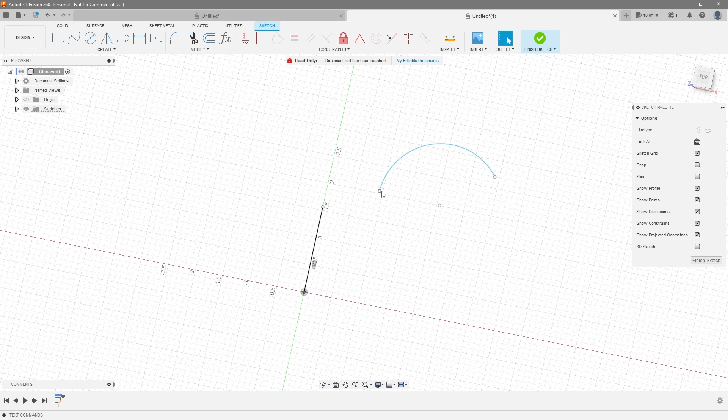If you're familiar with constraints in 2D sketching, let's say I have a line here. I can take an arc and connect that arc to that line. I can select both of those points and make them coincident, say I want that arc to be tangent to that line, and maybe make this a 2-inch radius. That is effectively a joint, but it's on 2D geometry rather than 3D geometry.

So what we are actually trying to do is connect various geometry of our modeled components together, just like we would do with a 2D sketch. For example, I want to connect this face to that face, or I want to connect this cylinder to that inner diameter.

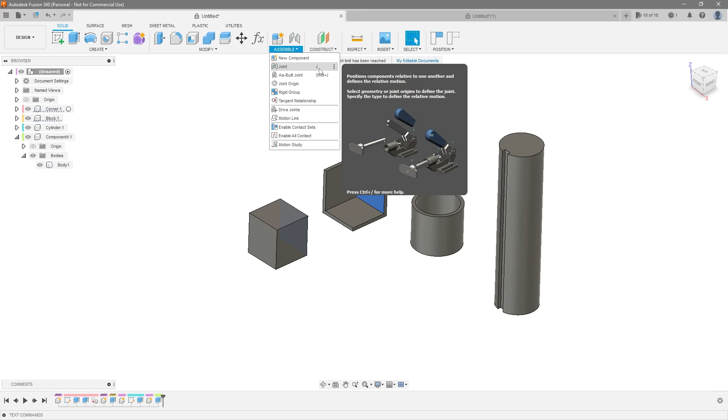So what I can do is select that face, hold Control, click that face, and then come up here and either hit the joint button, assemble joint, or hit J on your keyboard, which is my favorite way of doing this. Fusion will do its best - there is a method to the madness of how Fusion decides where to put items, which we'll go into in a minute. Fusion will try to lock that component to the other component with the information you gave it.

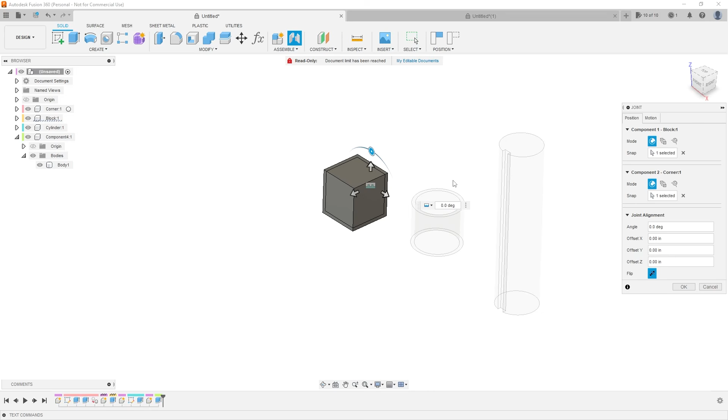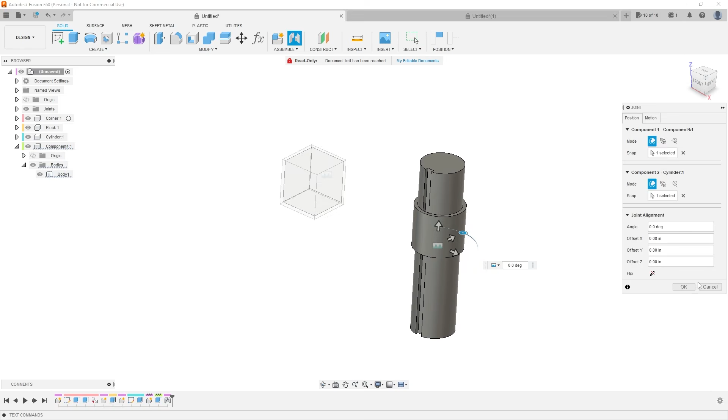Right now I can move this component, and right now I can move this component - they're two separate entities. But if I select that face, select that, hit J, and hit OK, now those two move together. I can do the same thing with a cylinder - select that and this, hit J on my keyboard, hit OK, and those will now move as one piece. However, you'll notice that this didn't line up in the center, or ring to ring or anything, because we gave Fusion too little information.

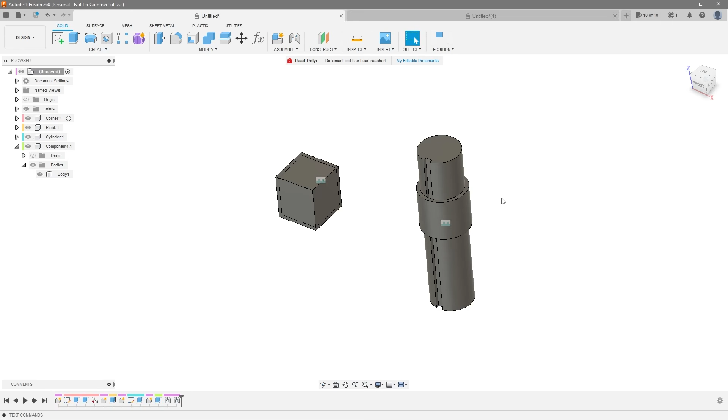We need to give it a better set of instructions. In order to understand why Fusion aligned this ring to this cylinder in that fashion, we actually need to take a step back and understand how components work, because I think that will clear up a lot of the confusion around joints in Fusion 360.

So in order to understand components, we actually need to understand the design tree a little bit, because that will really help explain how these components interact with each other when applying joints. Anytime you open up a new design, you have the top level part of your tree, but you'll notice that it's actually a component. We have one component already provided for us in our model, and all that is in it is an origin point.

This is a fixed component. This component cannot move, and anything that is designed directly under this component cannot move either, which we'll talk about in a second. But that origin point is one fixed or known spot on the model, so that way Fusion knows what to do with all the other components.

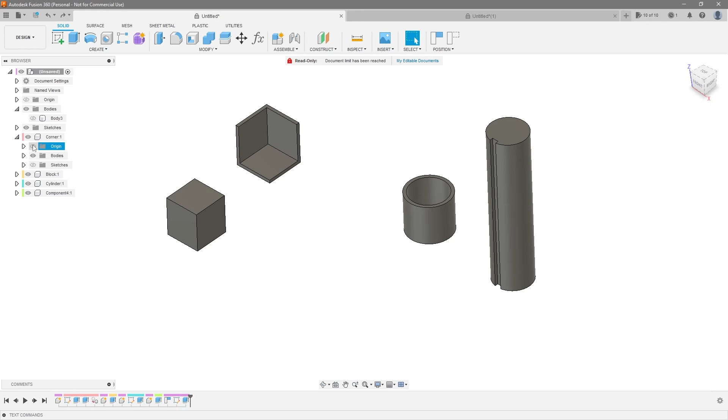Anytime you create a new component, you're actually creating a new origin point. If I highlight the origin point at the top of our model, it's right here—this is the one that can't move. But now that I've created a new component called corner, that origin can move along with that component.

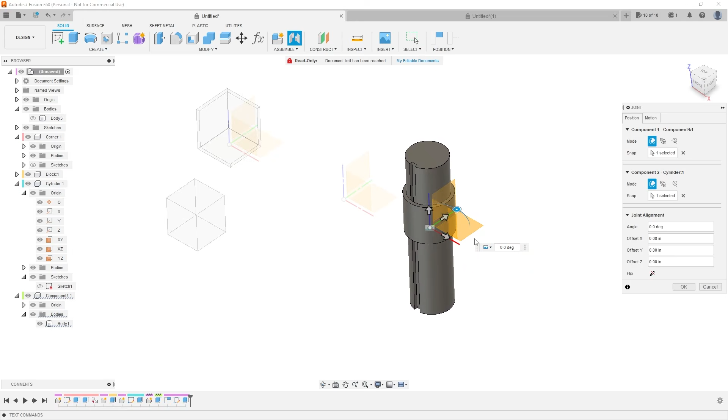What can often happen, which confuses a lot of people, is when you try to join this to this, we didn't really provide Fusion a lot of information on how we wanted those to relate to each other. If I open these up and show their origin points, all we said was this face to this face. If I hit J, Fusion doesn't know what to do with it, so it simply aligns their origin points. That's why this ring, for example, didn't align to the top or exactly in the middle between this face and this face.

That's why it's important to remember, because when you sketch on this top level component, that origin point is fixed. If I create a body, just a top level body right here, I can't move that anywhere, because it's drawn in relation to this origin point—not a separate origin point we would have given it if we created it as a new component.

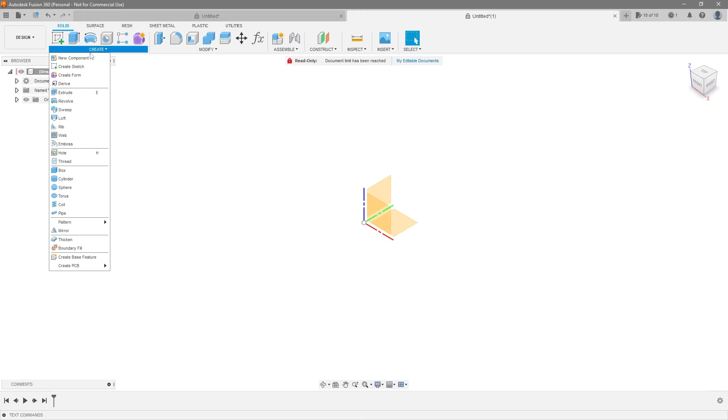That's why top level bodies cannot move, and it's almost always a good idea, whenever you create a new design, to hit create new component first, because later on you'll be able to move that item elsewhere once you've created other geometry. But it can also be useful to have a top level body that is fixed and can't move, since that makes joining everything else to it much easier.

Let's say all of these components we created are intended to be joined to this cylinder. They're not really the right shape for that right now, but that would mean I could join this to this, hit OK, and now it can no longer move because the base body it's connected to cannot move. Even though these two could move together before, this one can no longer move because it's joined to a body that is fixed. That can actually be a pretty useful way of creating an assembly.

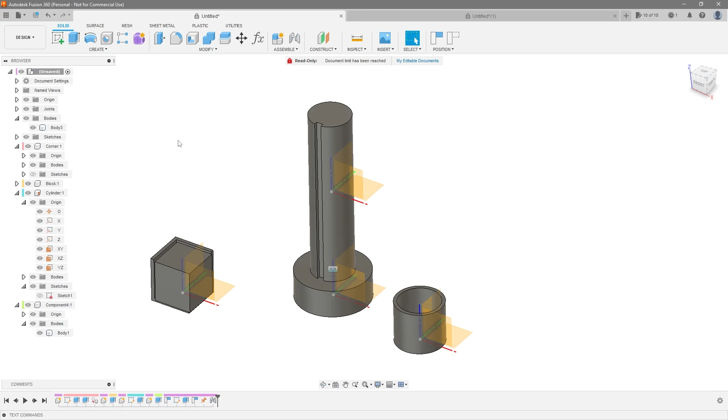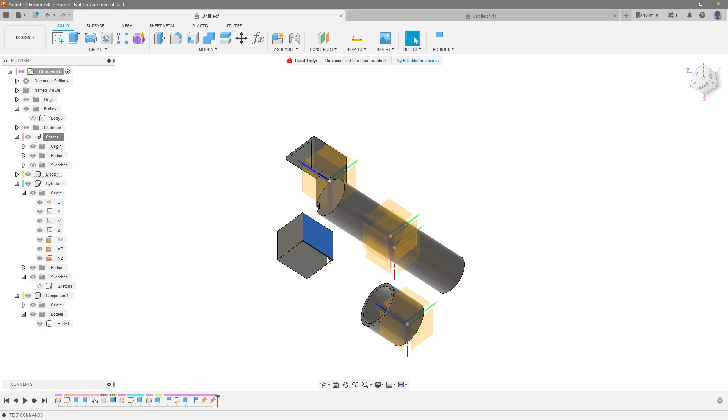There's also another, often better way to do that: ground an item. If we didn't have a top level body and just created components, we could right click and hit ground. That fixes that component in place and adds it to your timeline. So wherever this origin point happens to be in relation to this one, it's now fixed and can no longer move. Then, if we join these two together and hit OK, I can no longer move them because that bracket on the back is fixed in place. That's a good way to lock down your model so it doesn't get too unruly when you have a lot of components.

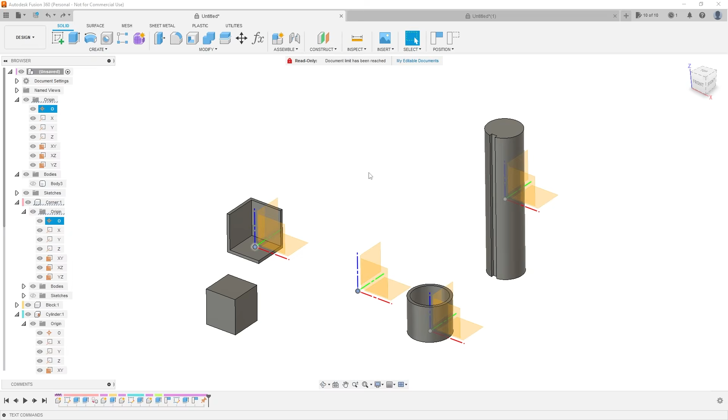Another way to do it—actually one of my favorite methods—is to simply join the origins together. I'll come into my design tree and select this origin point and this origin point, hit J, and join those together. That way the base component I want to join everything else to, even though it's its own component rather than a top level body, is aligned with the origin point of the model. That way everything is centered and my camera rotates around that pivot point, which can be a really good way to do it.

So now we understand that when we join components together, if we don't provide enough information, Fusion will align the origin points, and sometimes that can give undesirable results. But if we give it the proper information, we can go ahead and join everything the way we expect.

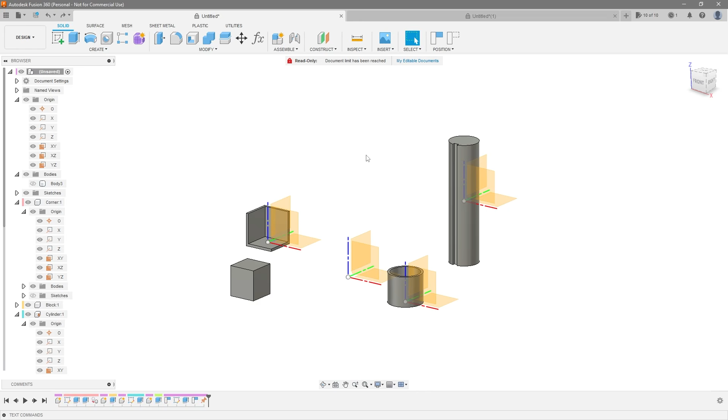So let's say this ring to this ring, hit J, hit OK, and now those two are locked together. But maybe we didn't want these to be rigidly connected together. Maybe we wanted some rotation available to it. For example, if this was a bushing and this was a cylinder, then maybe we wanted this bushing to be able to rotate around this body.

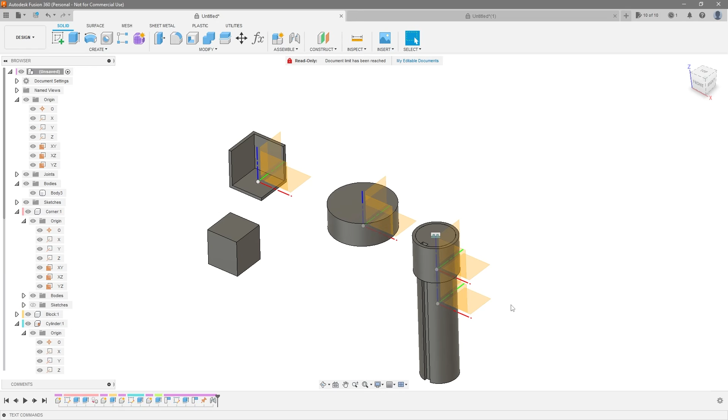That's where the second half of joints comes into play, because rather than just rigidly connecting via the origin point or letting Fusion decide where we want it to go, we can give it a better set of instructions and actually open up freedom of movement in one or sometimes multiple axes. So let's go ahead and talk about the different types of joints and how to apply them.

Let's go ahead and start with this cube right here, because we've already talked about how to select those two faces and hit J and let Fusion decide, but maybe we want to elaborate a little bit on how those are supposed to be connected. So something I unfortunately didn't show you earlier is when you just select these two and hit J, Fusion automatically assumes you want to do those.

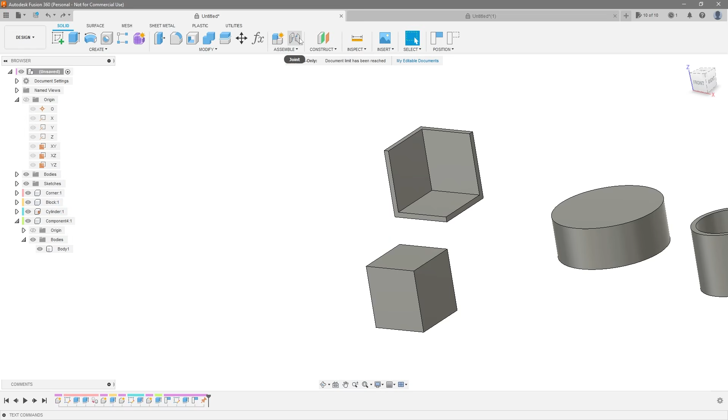But what you can do is if you hit joint first before selecting your geometry and you hover your mouse over, you can pick which point and which axis of that point you're trying to join that to. For example, if I wanted to achieve the same thing, I could say the center point of this face to the center point of that face. And that's effectively what Fusion was trying to do earlier, or assuming. But maybe that's not what I actually wanted.

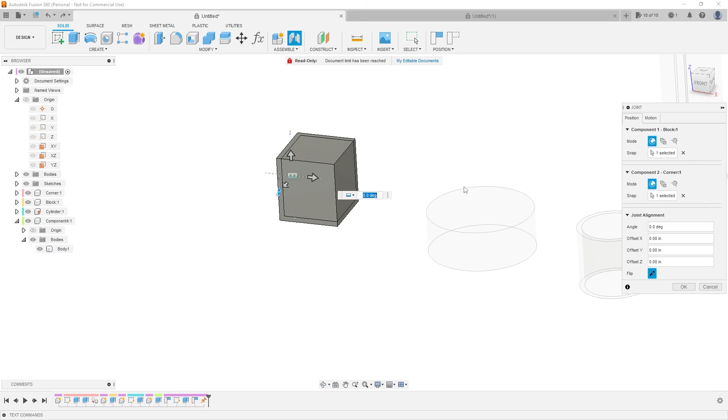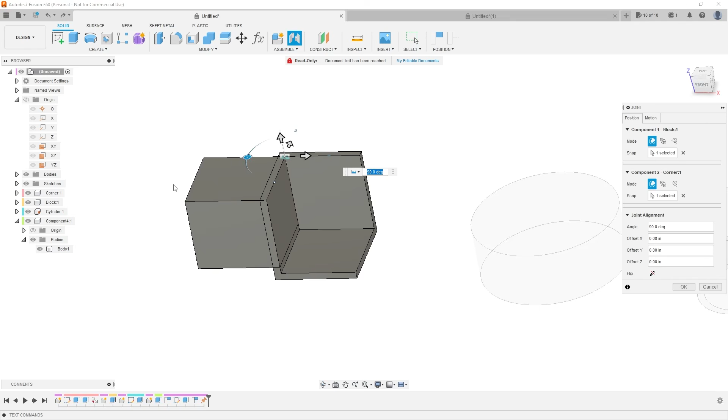Maybe I wanted this corner to be aligned with that corner, and I wanted to join it in that fashion. Or maybe I wanted that corner, but on this axis, to be aligned to that corner on that axis. And you'll notice that Fusion had to rotate in order to accommodate that. So effectively what it did is we were picking which part of the origin point of this model do we want to align to the origin point of this model. But that is a basic rigid connection. You can pick which part of the model you want to connect to each one.

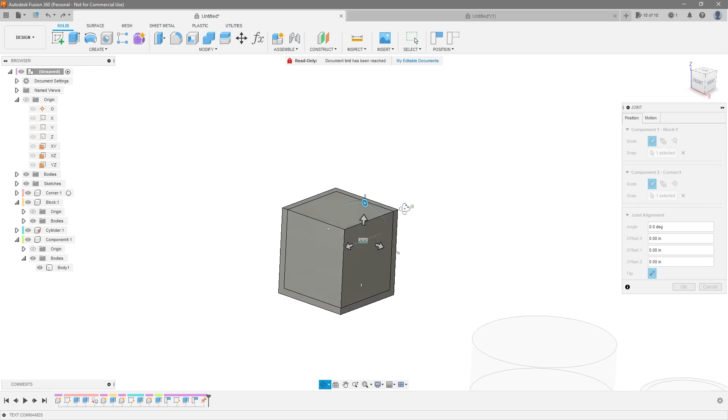Now, what we can do is once those are connected, so let's say the center point here and the center point here. Well, Fusion, since these two faces are coplanar to each other, Fusion can only rotate this model in one direction. So there is a rotating wheel here.

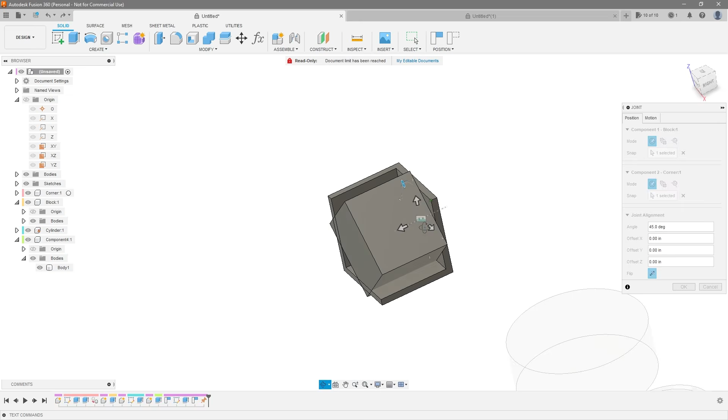So if I didn't want them to be coplanar, or the other faces to be coplanar, I could say I want those to be joined that way. Now that really wouldn't make sense in this type of a model, but not only can I do that, I can also say an offset from that face. So I want those to be joined, but I want that to be, let's say, 3 inches off, so that way it roughly lines up with the outside there. And I could do it that way too. So now those two are fixed together in that position.

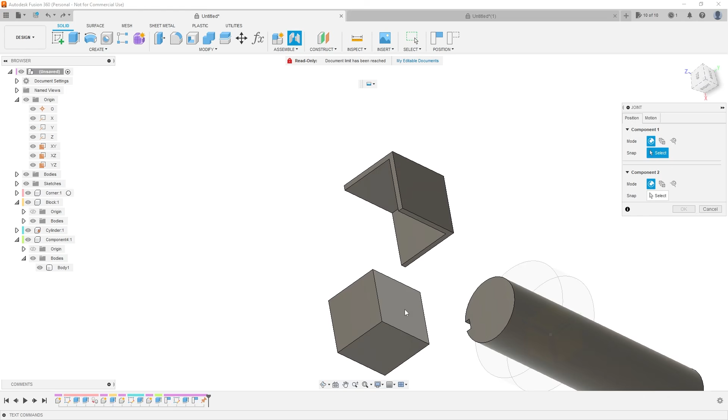So if we undo that, let's go back and say the center point here to the center point here. What I can also do is I can flip that orientation. So if Fusion guessed wrong on which orientation of that face you want to be connected, you can come down here and hit flip, and it will flip it to the other side of the joint. That is immensely helpful because once you get into more complicated models, that is very common, and you'll often find yourself flipping your joint 90% of the time.

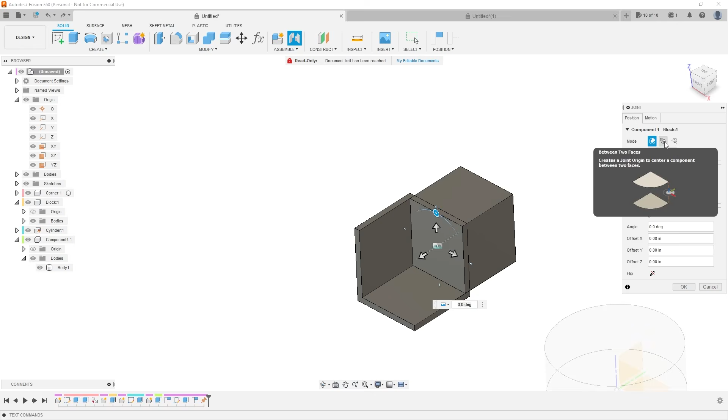So on this tab, there's also a couple different options. There's between two faces, and there's also two-edge intersection. Let's cover two-edge intersection first because that's more relevant to the cube.

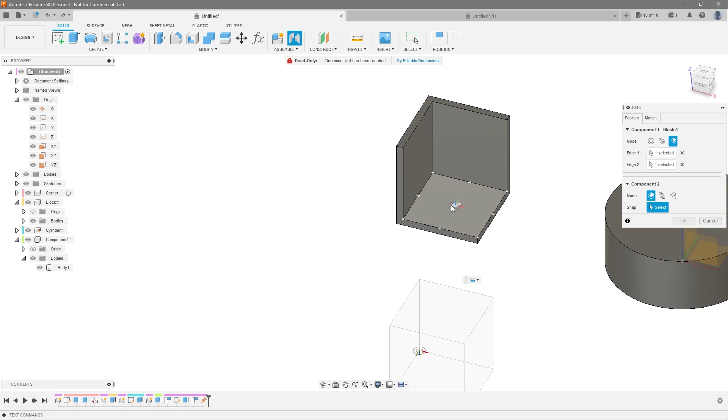So what two-edge intersection does is I can say I want the intersection of this edge and this edge, which happens to be that point, but that's not always the case on other models, to align, let's say, to the center point of this face. So it's taking the intersection of that edge and the intersection of this edge and aligning it to the point that we selected on that face. So I could say I want it to align to this face, and it will move it to that location. That's basically how two-edge intersection works, but it can be very useful on more complicated models.

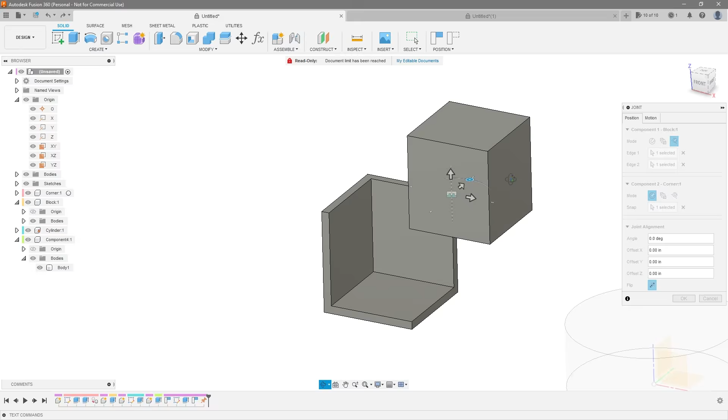Let's talk about Between Two Faces, which in my opinion is one of the most powerful joints that exists in Fusion, and one that was sorely missing for quite a few years until they added it, but only under a right-click menu.

Thankfully, Fusion finally placed it in the actual joint menu. In SolidWorks, for example, this was an incredibly powerful tool under advanced mates called the width mate, which lets you select 4 faces and have 2 of those faces exactly centered between the other 2. Let me show you how this works—this is a way we can guarantee this bushing will be exactly in the center of this model, even if we change the dimensions of this cylinder.

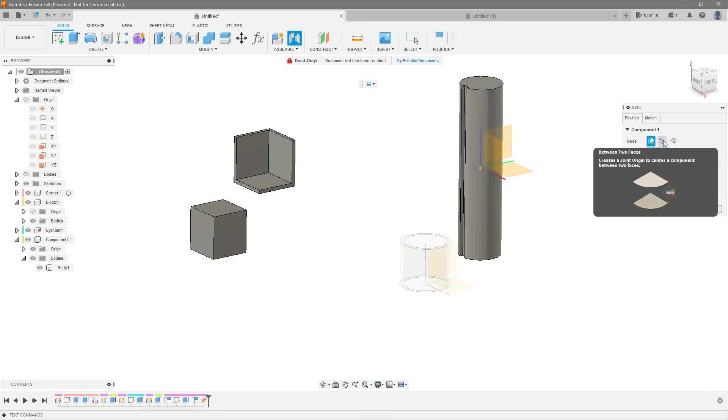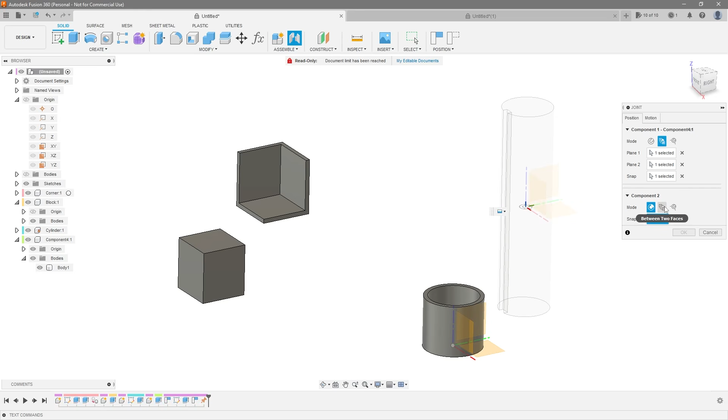So we can say Between Two Faces, and select this face and this face of this component. Where do we want the snap point to be? I can highlight over this, or come here and say the center point, which aligns it with the center point of that model. Then I can say Between Two Faces on the other model, select this face and this face, and do the same thing. What it's going to do is analyze your models and make the distance from this face to this face the same as the distance from this face to that face, along that center axis.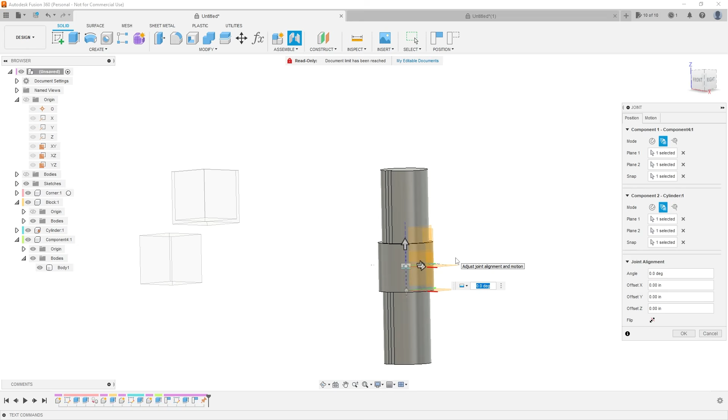That's an incredibly powerful way of lining up, say, screws or shafts that are meant to rotate, where there's clearance between them, and you want them to be able to move, slide, and rotate.

That brings us to the second tab up here, called Motion. This allows us to add or remove certain degrees of freedom from the joint we just created. This is the biggest difference between mates in SolidWorks versus joints in Fusion.

Mates in SolidWorks work as an additive system—you start with no constraints and constrain each axis of that part one by one until only the freedom of movement you want is left available. If you wanted to fully lock it down, you would add a constraint to that axis as well, or a mate rather.

But in Fusion, what it tries to do—which can be infuriating sometimes, but also sometimes elegant—is automatically do all of that at once. So right now, because we did Between Two Faces, it's a rigid joint that's automatically locked down. We did that with one joint in Fusion, but it would actually take three mates in SolidWorks, whereas we did it with one joint in Fusion.

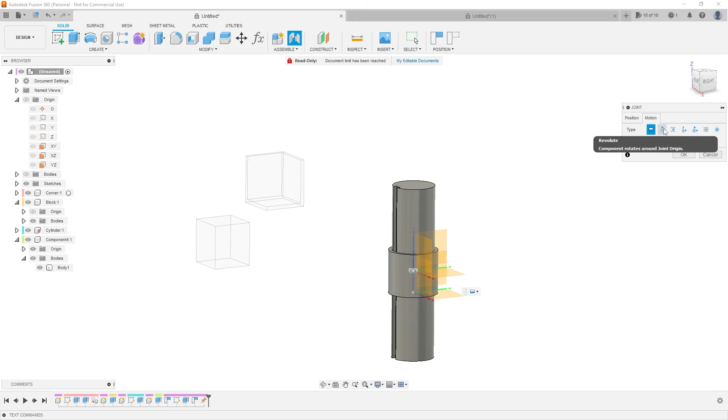Instead of adding additional joints to constrain each axis, we can just remove one freedom of movement, or sometimes two. For example, maybe we wanted this to be able to rotate inside this bushing, so I could select Revolute, which allows it to revolve in whichever axis we choose—X-axis, which makes no sense here, or Y-axis, same thing, or Z, which allows it to rotate. There's also Custom, which you don't use often, but sometimes you need it to revolve diagonally or something. That's an easy one.

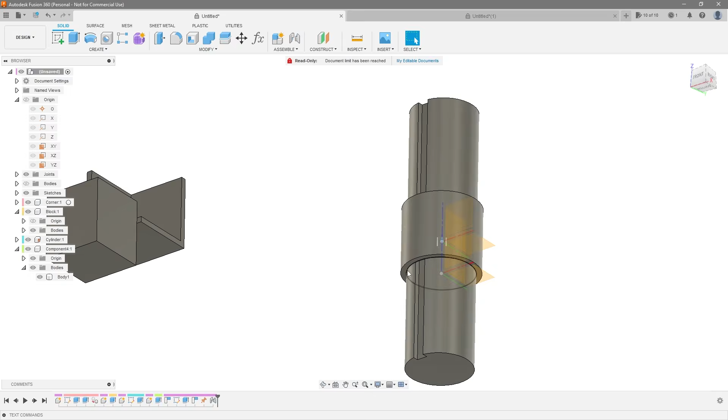Then we can also go to Slider, which allows this to slide up and down. Let me hit OK real quick, because even though these two are aligned, the distance between these two faces is the same on both sides. Because we've added a sliding mate, I can move that model out of position.

What's the point of this? The point is that this is a temporary state—if I come back to this highlighted section and double-click it, I can hit 0 and it will always go back to the default rigid position. That lets me move my model up and down to see how everything interacts, and when I need to bring it back to its standard position, I just come back here, hit 0, and everything will be back where we expect it.

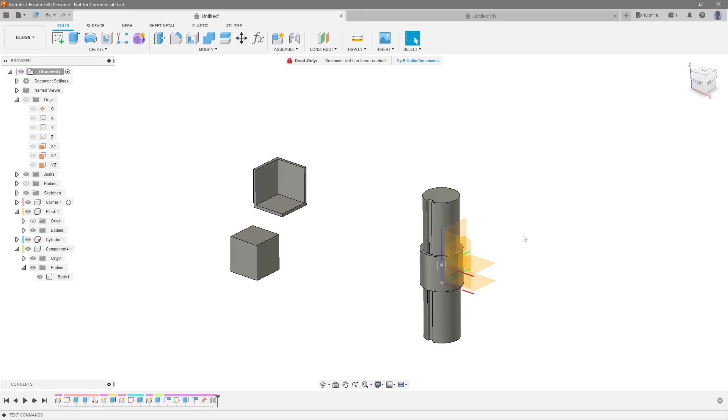So let me open up that joint again.

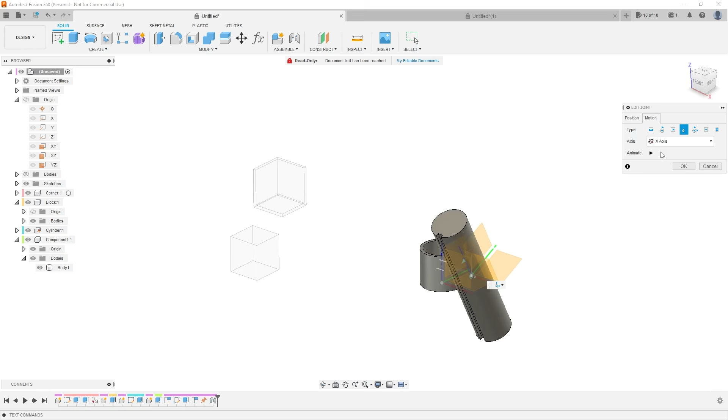And then we have cylindrical, which is actually 2 axes. So not only is it rotating in the Z-axis, it's also moving up and down in the Z-axis. It's kind of a revolute and a slider combined into one. If I animate that again, I could say Y-axis or X-axis, and if I say Z, it's going to revolve and move up and down at the same time. So if I bring this up, it allows freedom of movement in both of those axes.

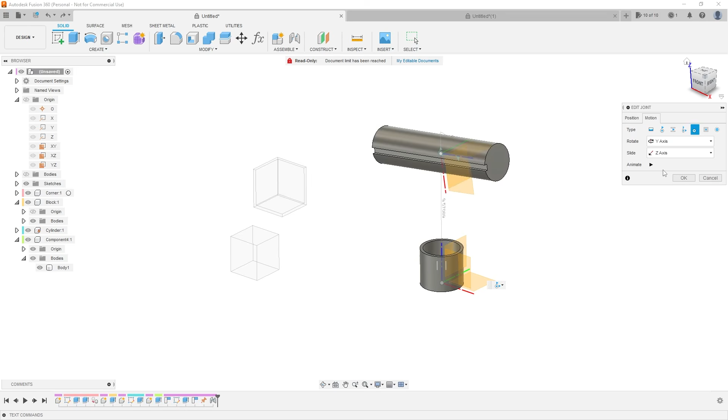Now if I come back to edit joint, let's keep going through these. There's also pin slot. It would allow freedom of movement in 2 axes as well, and you can define each axis separately, whereas in cylindrical it's kind of assumed. In pin slot, you can say which axis is the rotation and which axis is the slide. So I could say I want it to rotate in the Y-axis but slide in the Z-axis, or rotate or slide in the X-axis and rotate in the Y-axis.

That's a really interesting one that I could see being useful for certain gears or certain things like that.

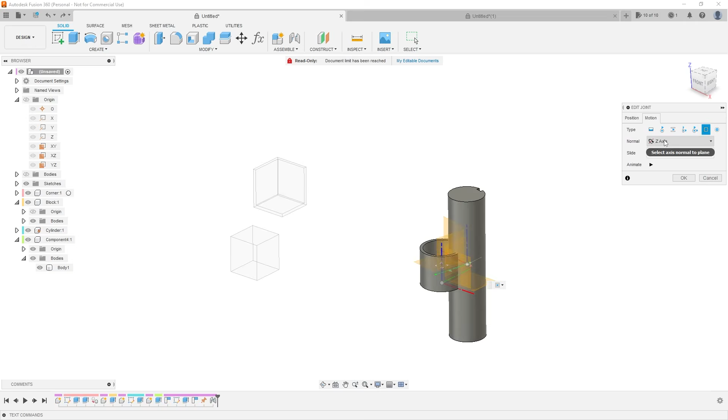Then you also have the planar, which allows the model to move in 2 axes and also rotate in a different axis. Let's play that again. You can see the model can rotate, but it's also moving between 2 axes. If my normal axis is Z and my slide is X, then it's automatically going to assume it's going to move between these two axes.

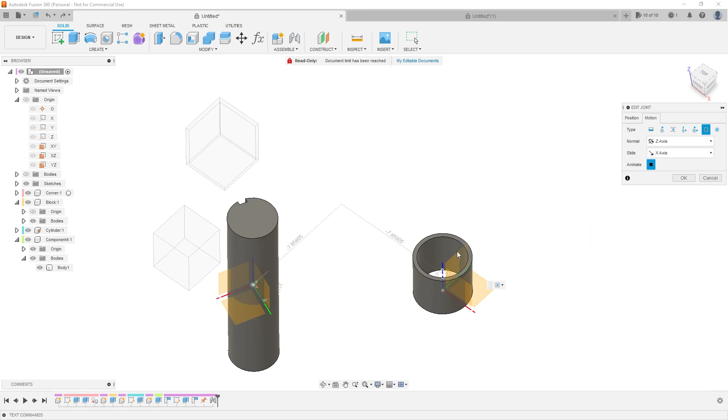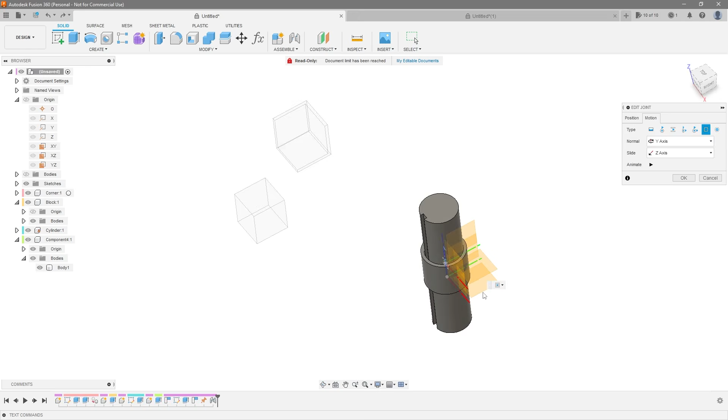So I could say let's move this to Y, and that allows it to move in Z. You can see from this angle, let's reanimate that. It is rotating around in Y, but it's also rotating this way and going up and down. Now that's a pretty hard joint to get your head wrapped around, and in this case it makes zero sense, but on certain applications it'll make more.

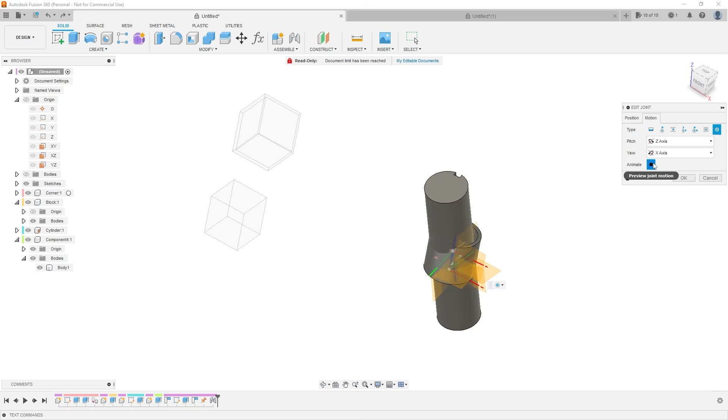Then you also have ball, and basically ball is 3-axis movement. It's like a ball joint for a camera. That would be a perfect use case scenario for this type of joint, where you've got a ball joint and you need it to move in all 3 axes depending on how you grab it, but still being located around a central point.

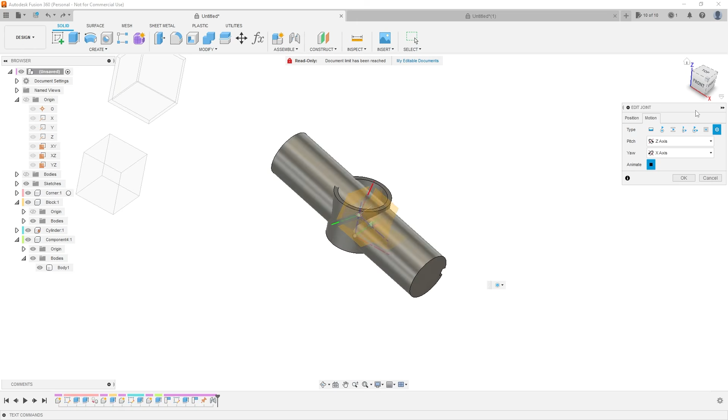I apologize if I didn't explain the last couple very well because I've honestly never really had a good opportunity to use them. I was kind of winging it a little bit, but I've played around with them enough to roughly understand what they do, though not necessarily the applications they should be applied to. So if I got some of those majorly wrong, please let me know in the comments, and I apologize about that.

But let's actually move on to a real model where we're going to do a relatively quick assembly and use some of these techniques we just applied. So here's a prototype Z-axis that I was building a while ago for a machine I was going to build. I never finished it — I don't have ball screws, top plates, or anything like that. But this is going to be a pretty good use case that will show quite a bit of the techniques we just went over on how to use joints for assemblies.

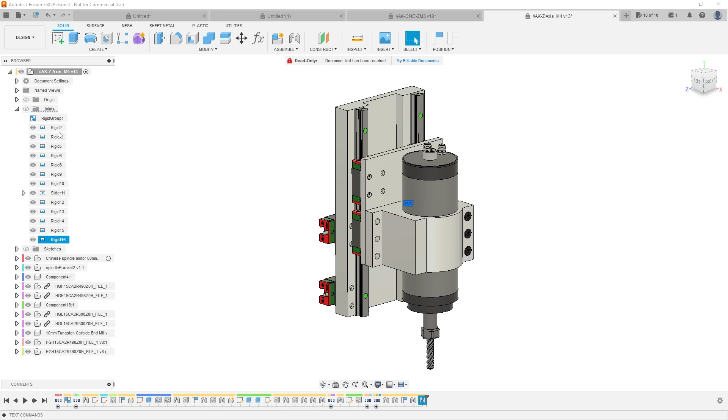So what I'm actually going to do — you can see right here that it slides. I'm just going to delete all of these joints except for the rigid group at the top. Now everything's kind of flipped over the wrong direction, and we're going to have to realign and get everything back into place. So this is going to be a pretty good use case.

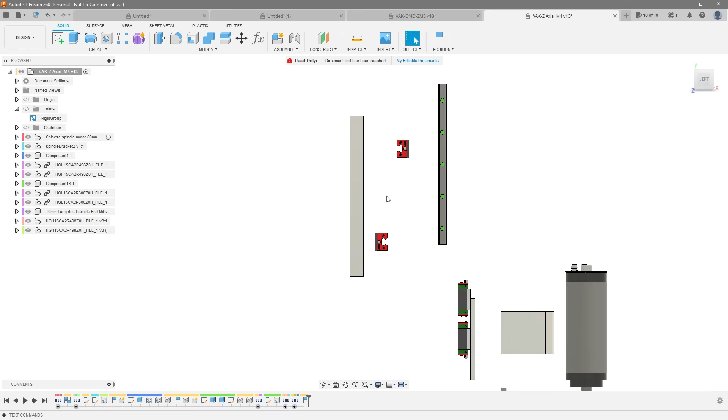So let's go ahead and assemble this back plate first to these bearing blocks. Let's go ahead and do that, bring it into position roughly so we can see everything a little bit better. Okay, now let's go ahead and join these. What I'm going to do is say I want this ring right here to go to that ring right there — really simple, just make sure it's a rigid joint. Yep, now it can't move and it's moving along with this plate. So we're going to do the same thing on the other side.

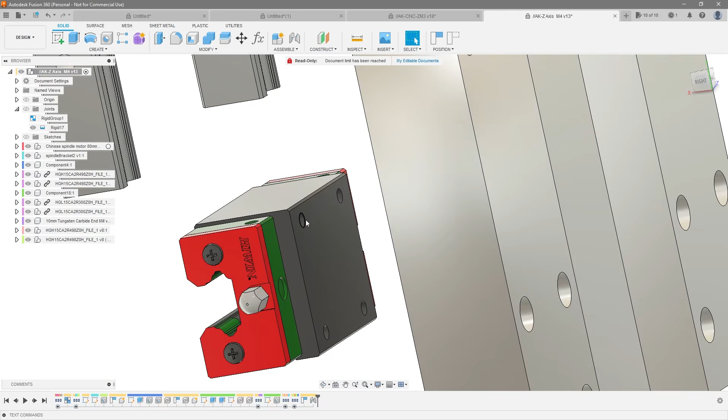And we're going to say that ring goes there. Hit OK, rigid joint, done.

Now you'll notice that these two are actually flipped backwards, so this is going to be interesting because we'll have to reorient this a little bit. This face should be facing that face.

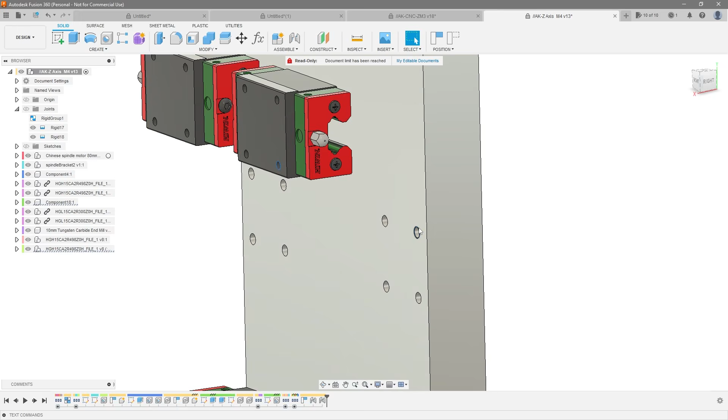So what we want to do is select this ring right here and connect it to that ring. You'll notice it's going to orient incorrectly, so we need to flip that orientation. But it's still not quite right because the grease valve should be facing the outside, so I'm going to rotate that model into the correct orientation. And now that's in the correct place.

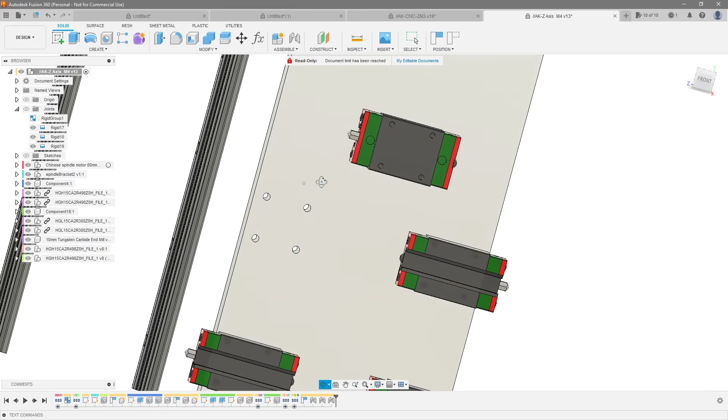So we can go ahead and be done with that one. We're going to do the same thing to this side: say this one right here to that one right there. These are just the screw holes that these would mount to. I need to flip that orientation, then rotate it into place, making sure it snaps to 90 degrees. And we're good to go.

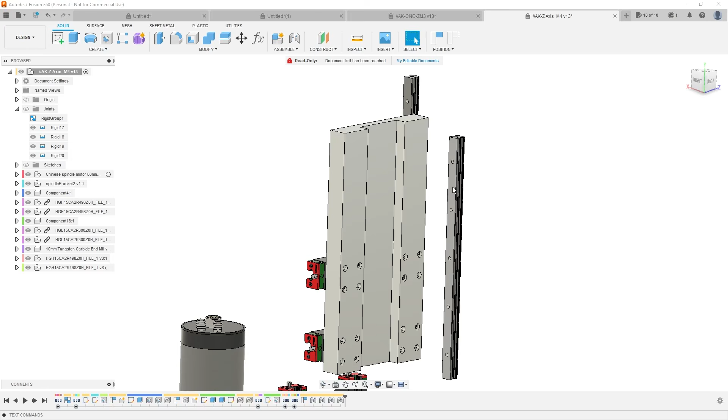So that plate right there is kind of already assembled. Okay, so now we need to get these rails attached to this plate. Unfortunately, I didn't include the mounting holes because I never really got that far.

So what we're going to do is select this face, and select this face, and hit J to see what happens. In this case, that works out because they are already the same length.

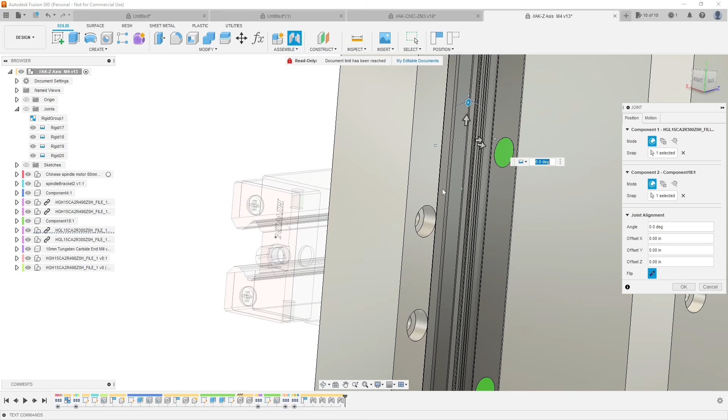Now, if they weren't the same length, you might be able to do between two faces - between this face and that one, this face and that one, etc. Or you might be able to create your mounting holes and do it just like we did with the bearings on the back. In this case, it actually works pretty easily.

So we're just going to hit OK. And then on this one, we want to also mount this face to this face, and that's going to line up for us, and we're good there.

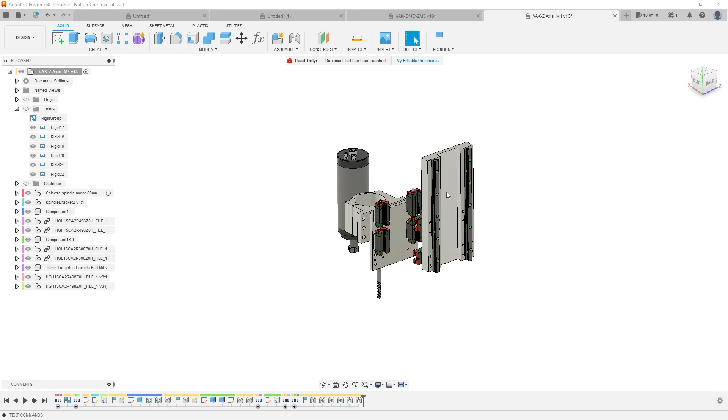So now that we've got that pre-assembly done, we're going to mount these bearing blocks to this, but you'll notice everything's kind of facing the wrong direction. So what I'm going to do is take the origin of this and join it to the origin of our top level assembly, which is right there.

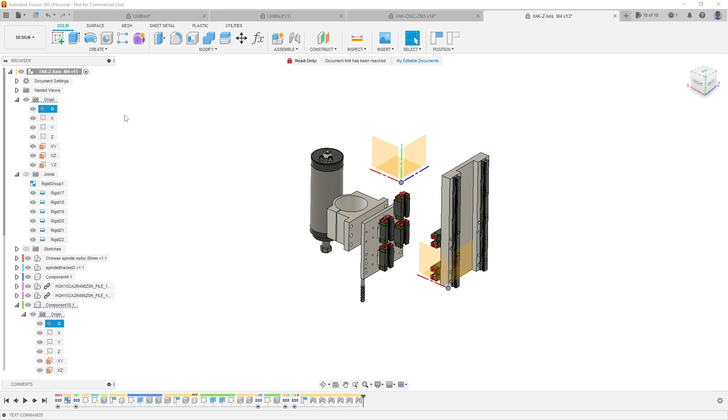I'm going to click on that plate, find that component, open up that origin, and click on that origin to join it to this origin. Hit J, make it a rigid joint, and hit OK. Now this is locked down, so nothing gets rotated around by accident later on, since we've got so many moving components. Then I'm going to hide that origin.

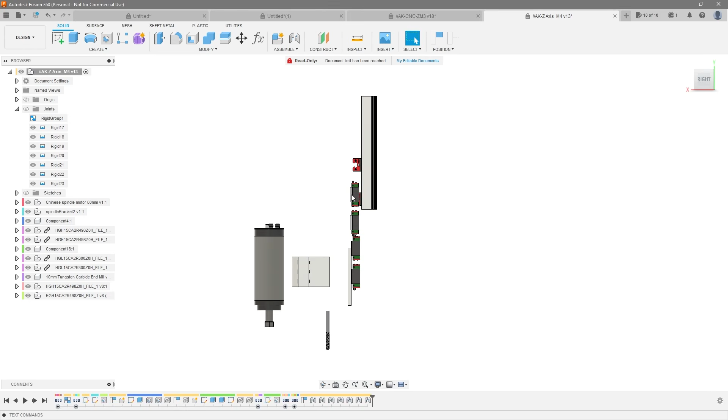Let's mount these bearing blocks. I'm going to look at it from this direction and put these roughly in place. Then look at it from this direction - we'll put it right about there.

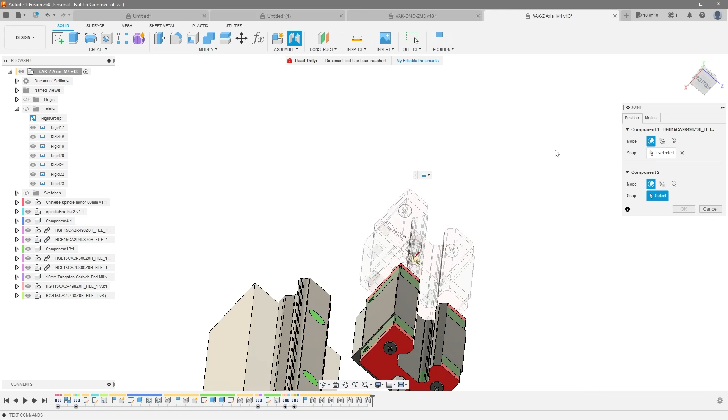Okay, so now we're going to actually do the between-two-faces joint like I showed you, and how you can utilize those pivot points. If I hit J on my keyboard, I'm going to joint between this face and this face. Oh, I didn't actually select between two faces - I want to select between this face and this face, and also between two faces for the pivot point.

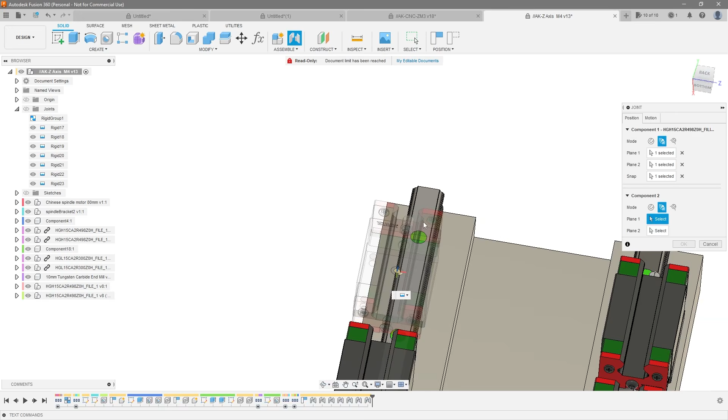We're going to click on this face right here, if I can get it, and then select between two faces on this - this one right here, the bottom - and then the pivot or snap will be right there. Now you'll notice that automatically snapped into position. If it showed up flipped, all I'd need to do is hit the flip button.

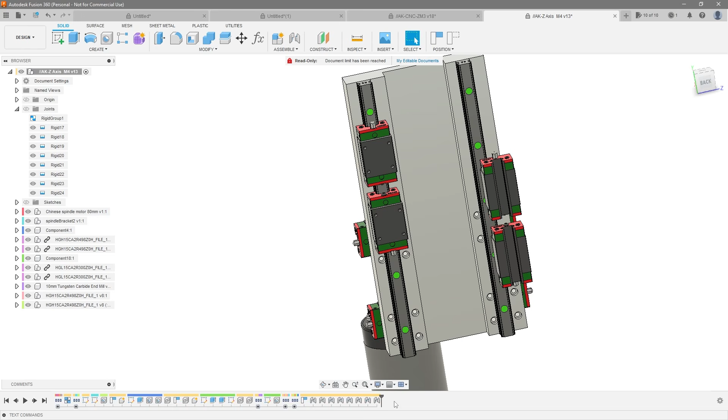If I hit OK, right now it's a rigid joint, but I actually want these to slide. So I'm going to go into slider, make sure it's moving in the correct direction, and hit OK. Now these blocks can move up and down here.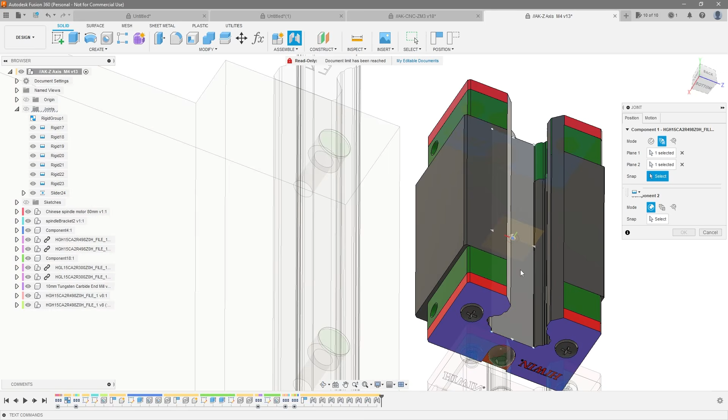Now we're going to do the same thing to this side. I'm going to hit J, between two faces - this face and this face - and then the pivot will be this face right here. We'll also do between two faces up here, that part, and then the snap will be that center circle. Yes, it aligned correctly, hit OK.

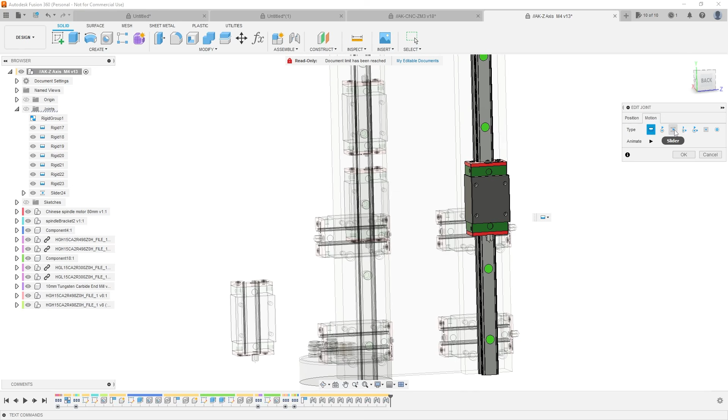And that is a rigid joint, so we need to go back, edit, go to motion, and hit slider. Now it can move appropriately, and we're in business. So now these two can rotate, or not rotate, and slide appropriately.

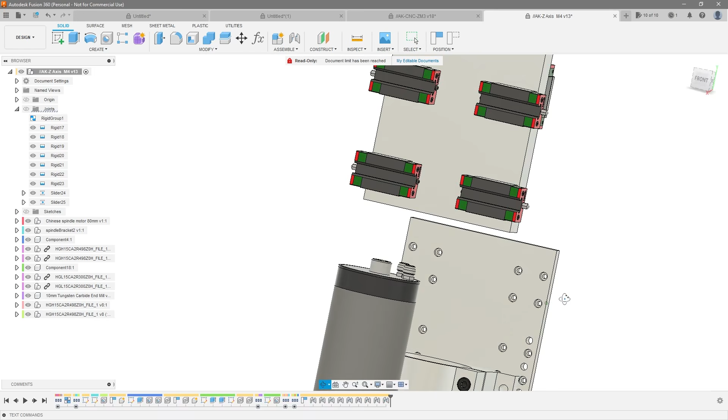So now we need to go ahead and connect this plate to those right there, so that way these will move in sync with each other all the time. Let's look at which side is the front. So this is the side that's going to be the front, so we need to mount this back plate to it. I'm going to select this one right here and connect it to this top one right here.

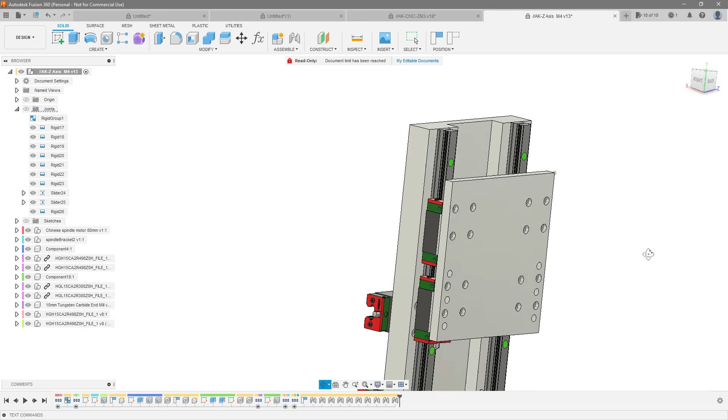Now I need to flip that orientation and rotate it into position. Make sure it's set to 180. Yes, we're good there. Okay, so now those two are moving together, and because we just did a rigid joint, we didn't have to do a slide joint on this plate because it's attached to a part that already has a slide joint applied.

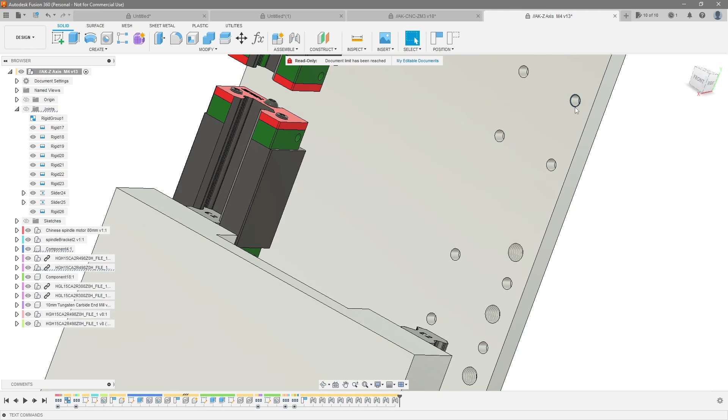So now all we need to do, this one's going to be a lot easier. All we need to do is attach this right here to this one right here. Make it a rigid joint. There we go. Make sure it's rigid. Yep, we're good. Okay, so now this whole plate moves up and down accordingly.

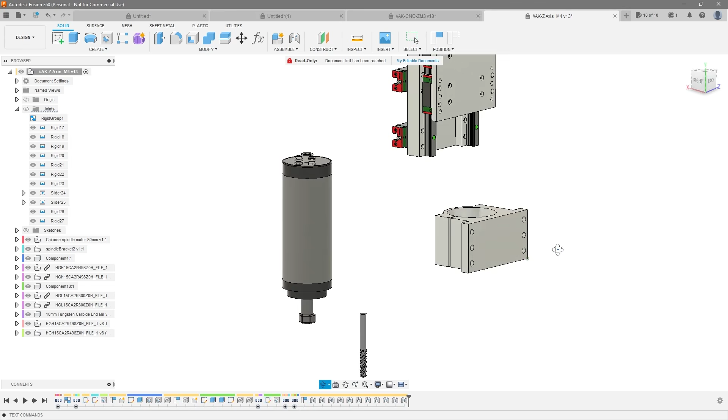So now we've got our rails and our bearings and our plates kind of established. All we really have left to do is go ahead and get the spindle mount on, throw in the spindle, and then we can be done with it.

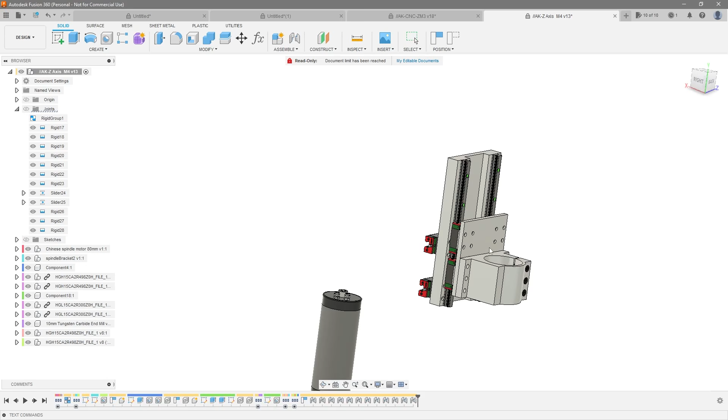So let's go ahead and mount this one because we already know this is kind of backwards. We're going to mount this one to this one right here. It's in the wrong orientation, so we're going to flip it. Now it's already in the correct orientation, so we can just hit OK. And remember, everything is still sliding together because these are all rigidly connected to a part that has a sliding joint.

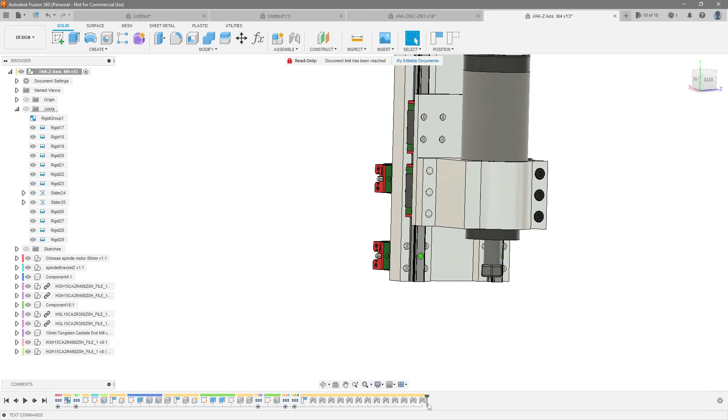Now we just want to go ahead and add our spindle. So I can say spindle, we're going to join it from here to this ring, and let's hit OK for now. Now that's assuming I wanted to mount it all the way down, but maybe I don't want to do that. So maybe I want to make sure that there is 1.5 inches below the mounting ring, so negative 1.5, like that. Maybe I wanted to mount it like that, and that'd be fine.

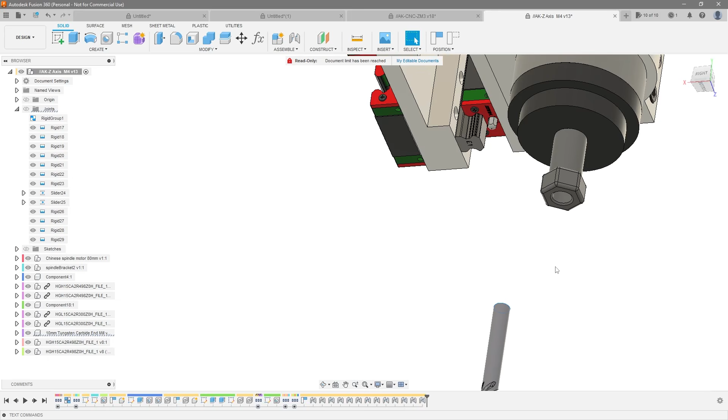And then I also have a little bit right here that I threw in there for detail. So let's go ahead and mount this one right here to this right here. Now that's sticking out too long, so we need to say we want the bit to be inserted into this, let's say 1.5 inches. And now we've quickly gotten this whole thing assembled to where it can slide.

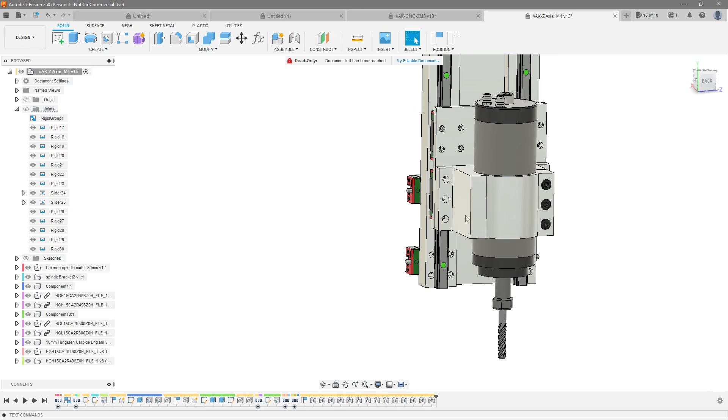Now, what would happen is I would then save this as its own file and insert it into my larger CNC assembly file, where I could then mount these blocks to the rails of my gantry, and make that a sliding joint so it could slide side to side rather than just up. But the Z-axis only travels in one axis, so that's the only motion joint we needed.

But this was a really quick example of how you can use joints to assemble and bring your model together and get the functionality you want out of it. So hopefully that clears up some of the confusion around joints in Fusion 360.

Now, I remember when I started using Fusion 5 or 6 years ago, the joints tool was much less developed than it is today. And I remember coming straight out of SolidWorks, it was infuriating and almost made me want to drop Fusion altogether. However, they have made a lot of improvements over the years, and I now find it much less frustrating to use than I used to.

There are a lot more advanced techniques for overcoming troublesome joints that I really couldn't get into today. So if you guys would like to see more on joints, maybe on specific models or something like that, let me know down in the comments and I would be happy to do that.